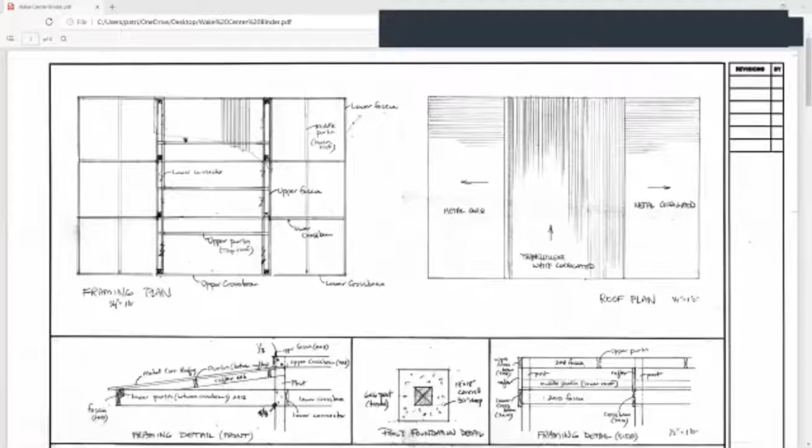Okay, do you guys see this blueprint on the screen? Yes, okay.

So I live in a community, a planned community. It's like a condominium, except we have yards and condos don't usually have yards. But there's common area that everybody owns. It's called Winchester Canyon. But when you change anything on your house, you have to get permission from the community. So we have a board of directors and a landscaping and architecture committee, and we have to submit stuff to them. Then they take it to the board and the board approves it. And then you have to take it to the city and get a permit. So there's extra stuff you have to do here.

So the back of my house, that's this right here, used to have just a roof. This is my dining room, this is my bedroom up here, and there was a window from the bedroom that looked out this way. And my wife said, you know, it'd really be great if we could have a balcony up here.

Can you do that? And I said, well yeah, sure, I can do it. So I went to the city and asked what I needed. The great thing about going to the building departments - Goleta was fairly painless, but I've been to building departments in the past, including Santa Barbara County and Santa Barbara City, that were not easy to get through. I don't know how they are now, they change over the years, but Goleta was really friendly, and they said you don't have to have an architect draw them, just bring some drawings about what you're doing.

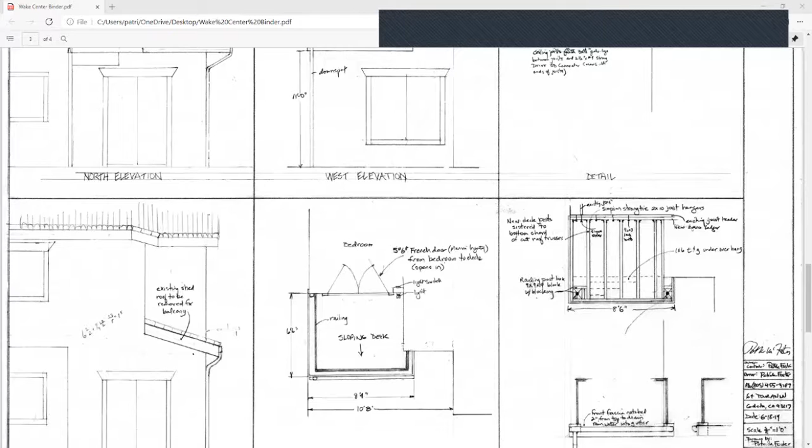That's probably a rare occasion when that happens because the laws are getting stricter all the time and it's just hard to keep up, and they'll undoubtedly have things to tell you. So they thought this was all okay. I have joists that are connected to a beam, and I had some foundation for the railing. And then I had a special coat - what's that called?

Tough coat or a bituminous deck cover. And then somewhere I talk about this, the particular decking system I'm going to have.

So they were fine with these. Then I went home and started demoing the ceilings, because that's how you get in. I demoed this roof and then there were just joists. And then I had to demo the whole area where the joists are. And when I demoed that, I got in the kitchen, looked up, and the joists were I-joists.

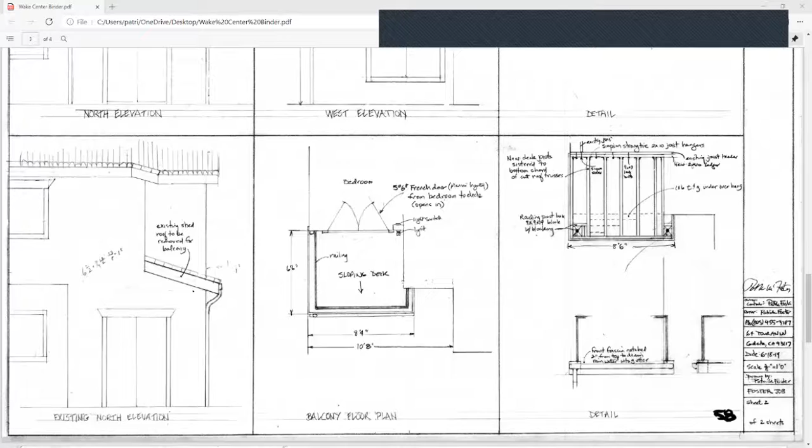You can't see where these are sloping here. I didn't know they were I-joists. So I thought if they're 2x10s, I could just cut them from the full size on the door end, cut them a couple inches or whatever for a quarter inch per foot slope. And I could just leave the ones already there, and maybe double them up if they're not 16 on center. They were 16 on center, but they were I-joists, and you can't cut into an I-joist like that, right?

Oh man, because that top part that holds the webbing, you can't mess with that. It's like a 1x2, and even 2 inches would practically get rid of it toward the end. They said, yeah, uh-oh, you gotta redo this. And I went, oh no.

And I said, what do I gotta do? They said, well, first you gotta go to a structural engineer. Well, there went my simple project, right? More money, more money. I turned to my wife and said, you know, we've only got a little bit of the sheetrock off, maybe we should just call it a day. And she said, no, let's do it.

So I went to the city, and let me show you what I also had to do, what the structural engineer gave me. So this is a picture of the lot. I'm on the board of directors, so I have access to all the blueprints in our community.

They have the most, they have site plans, a blueprint, a floor plan, but my particular unit's was lost over the years and I couldn't find one. So all I needed was a plot plan. They don't care what the interior is like. They just want to know, basically, if you're adding a room. This is a balcony, so it doesn't really add footage, but if you're adding a space, they want to make sure there's a ratio of built area to unbuilt area, yard area, that's a certain amount, not above a certain amount. So they ask you for all these things.

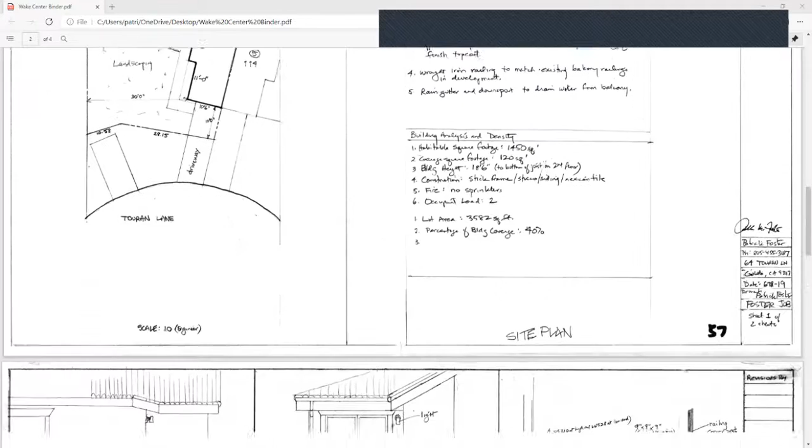Donna may know the proportion, I don't know it offhand, but 40% was okay. That's what I didn't add, so it had to be okay because it was what the original proportion was.

So if you don't have a plan, you know, you buy an old house, or you're renting one, or living with someone who doesn't have a plan, you're going to have to measure and draw this yourself, that's a pain in the ass. So it's really nice to have any kind of floor plans. Like I said, the city usually has plans for everywhere in their archives, and you can go get those. I don't know what they cost, I've actually done it before but I can't remember if I paid them. They probably have a fee for finding them.

But almost every, especially in a development that's highly regulated, they really hawk developments because if a builder could build one house in a crappy way, but he builds 50 houses that way, that's really bad. So you have to have a location map.

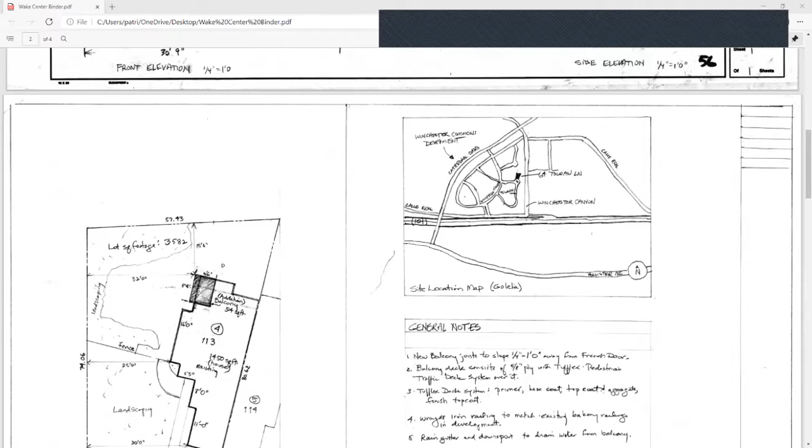Remember on the site plan, we had a location map so the inspector knows how to get there. This has the freeway and tells how to get to my house. Then general notes tell what I'm building, a balcony with French doors. The balcony consists of 5/8 ply with Tufflex, a pedestrian traffic deck system over it, and then I tell them what the system consists of. Then a wrought iron railing to match the existing railings.

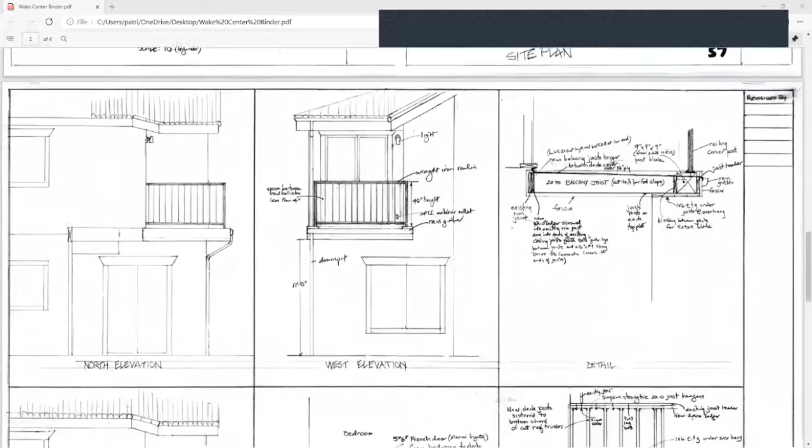In a development, everything has to match, so you have to kind of see. I had a friend who built wrought iron railings, so it was really great - I just told him what I needed and got a pretty good deal because I didn't have to go to a big company. And then you have to say you're going to complete a downspout and a rain gutter. So that's all - these 2 sheets were all I turned into the city.

And then after they told me that I would need a structural engineer, things got more complicated.

Okay, let me share those with you.

Okay, can you all see that screen? Yes, yeah. Now I'm learning things about this computer. We can't see this one though. Yeah, I know, with this particular... is it just loading up? Or no, I got to get rid of this thing. I don't know what this thing is here. That's so weird. There it is.

I get that, so if you go to this other place and then go to adjustments, then you can enlarge it and it won't... you can enlarge it and go up or down. On the other print, it wouldn't let you do that, so you have to go to a kind of edit type print.

It's still blocked out, Patrick, because you're sharing file viewer, not the viewer of the PDF or whatever this is. It's gray for us. Yeah, because you're in application sharing - you're sharing file viewer. Well, what does it look like? It's gray and not yellow. Yeah, it's grayed out, like a privacy filter over the top. But can you read it? Oh no, it's 100% blocked out.

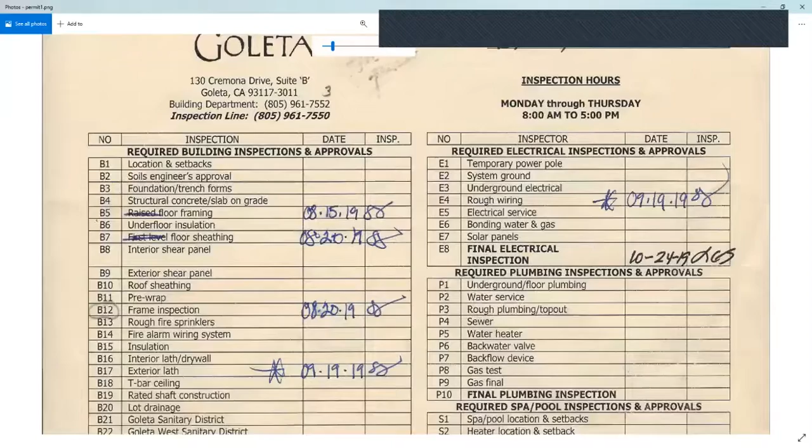There you go. Okay, so I want to get to the top because it's got City of Goleta, Building Department, Inspection Line. The Building Department rarely answers their phone and the inspection line rarely answers their phone. If you leave a message with the inspection line, that's calling for inspection, so they take that seriously and they will call you back. They do have a web, an email access that they answer sometimes.

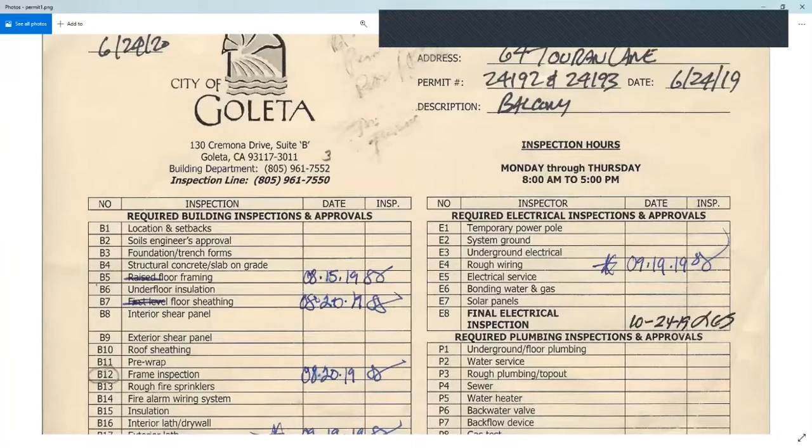So this is the form. They give you an expiration date. It has to be a certain time after you start. It has inspection hours. They're only going to come Monday through Thursday, 8 to 5. And then this has a list of all the different inspections that have to be done for this particular project. So let's go through those.

Since it's a second floor thing, we don't need anything to do with the ground, so no soils tests or slabs or anything. I guess they always cross this out because if you're doing second floor framing, you're always going to cross out the raised floor items. This is all kind of the first floor foundation stuff, so they cross that out.

Floor framing - I'll show you what I had to do with the framing. They had to inspect it because it had to be designed by a structural engineer. And then the sheathing had to be inspected over it. And then the frame inspection - I had a doorway I put in, a French door, so they had to inspect that. And then they have to inspect exterior lath.

Some of you may work in the lath field. So before it's plastered or stuccoed, they have to look and make sure the lath's put on correctly. In fact, on my job, the lath guys forgot a strip along there, and the inspector caught it and said, hey, you're missing a strip, you got to have that. So I had to call these guys back.

But the whole idea is to get everything approved in a tight order so you don't have to stall your subcontractors or your own work. That can be very difficult.

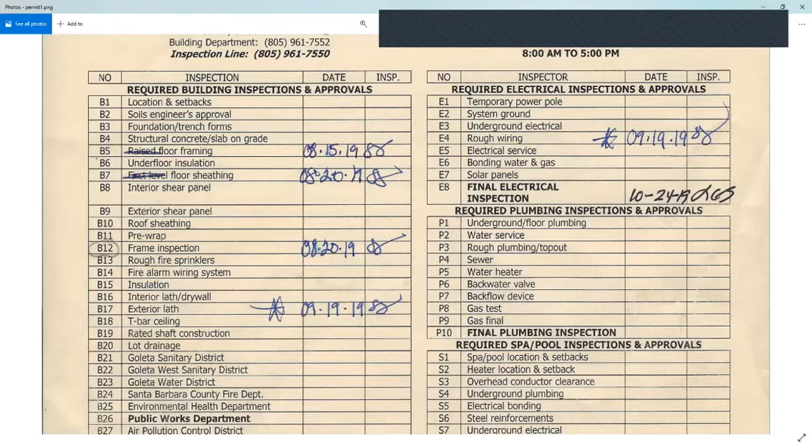Okay, that was all for the building framing part. Then there's mechanical - I didn't have any HVAC equipment, so that is irrelevant. But I did remember I had to put in a light and an outlet, so they had to do a rough wiring inspection. Before you cover the wall up with sheetrock or stucco, you have to have the rough wiring done so the inspector can see it. And if it's going to be covered up, you either have to take pictures.

So when I was doing my electrical, I did some of it and I had an electrician do some of it. The inspector said the holes in the floor plate that the wires went through - she said I had to insulate those.

I had to put some kind of foam around them, so I went and got some foam and sprayed those. There were little things I had forgotten about. And then there's a final inspection. It was the rough wiring and the final - she would notice if the outlet was done right and the light was done and all that. So that was all for the inspection.

But let's go to the... where is this thing? Yeah, there we go.

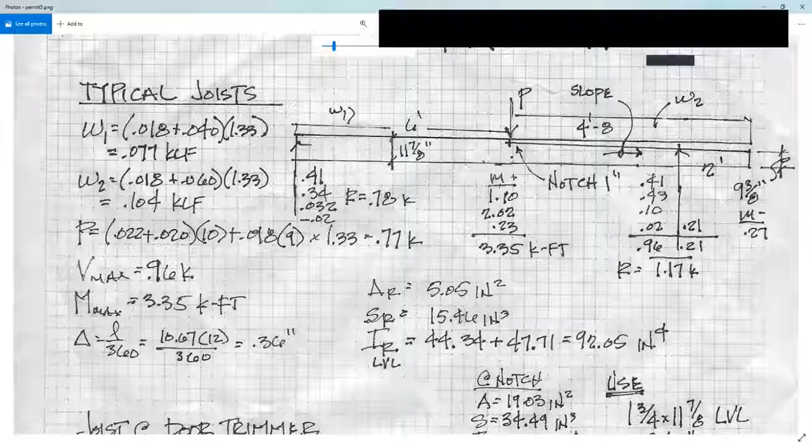Let's go to the last one here. Can you see this okay? Yes, clear. So it's pretty messy, but - 16 penny, see up here, upper left-hand corner, just follow the purple cursor to here: two 16 penny nails at 12 inches on center. So every foot I had to nail these two beams together, the LVL and the I-joist.

And then here there was a header - no, it just took blocking, I don't know what that was. Ply filler at each TJI web. So I put 1 by 12, same thing in there. And then he told me how to block.

And then on this wall, I see that little A35 - somebody was asking me last week about A35. So you need that to hold the blocking in. What else does he say? Yeah, then there's another A35 to each LVL against the beam.

So not only was the LVL nailed to this I-joist, but I also had to hang it to the beam, because one side was only open since it was sistered to the other beam. I had to use one A35 to the beam here. So that's what'll make it earthquake proof.

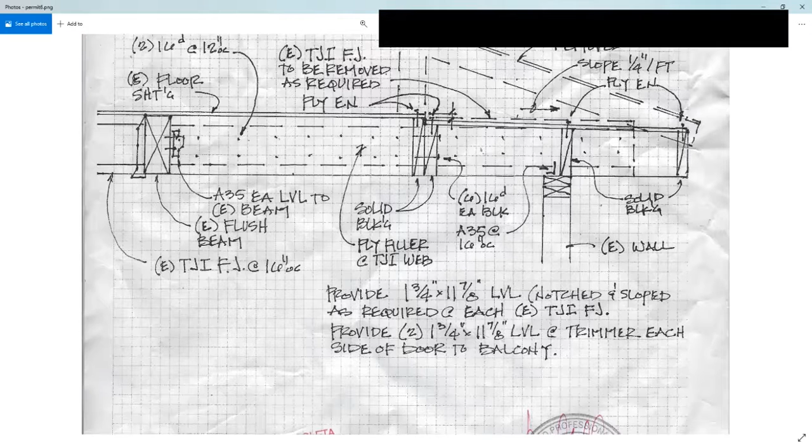So let's see, what are these other things here? Oh yeah, here's something important.

How's everybody doing? Good, man. I like the idea there, saving some labor by putting the wife to work. That's good. Hey, you may draw fire for that - it's the tip of the class so far. No, I was kidding. She wanted the balcony, right? Yeah, I know she did. She's a trooper too, she got right out there and did it. That's right, that's a lot of fun when you work at home.

One of the reasons I'm showing you this is to take the mystery out of it - the city does a lot of the work. A lot of stuff has to be engineered now because the city doesn't have the time or competence to approve certain dimensions of plans, so they just require it. An engineer has that competence. If there's any question at all, they don't want to get sued for approving a structure lacking quality or strength.

So that's cool, and some structural engineers charge a lot of money. I looked around and asked Rodney who he used, and somebody recommended this guy, and he was just a hero. He's inexpensive, and he's smart as a whip.

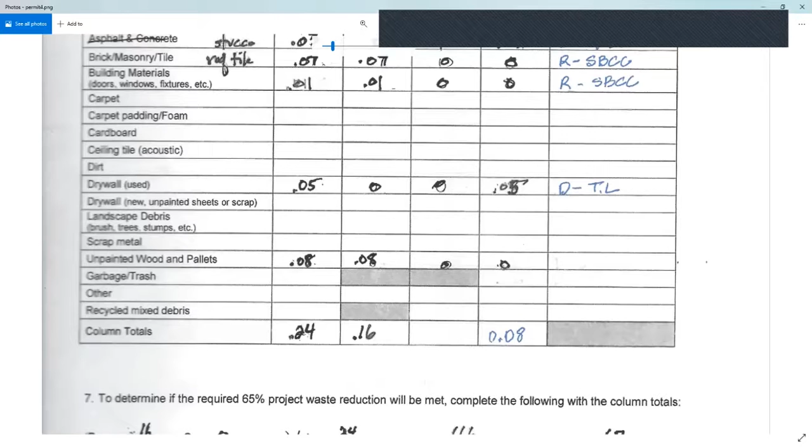So then you have to do a post-construction waste reduction and recycling summary report. Let me make this bigger for you. So material handling methods indicate quantities and tons only for each material.

So I had stucco that I demoed around the door - under the window was stucco because I was putting a door in, and I had to figure out how much stucco I had. There was a formula I used that converts the square footage of stucco into weight, and I ended up with 0.03 tons because it was just a little bit of stucco, but they want to know. I disposed of all of it to the Tajiguas landfill because there was nothing I could do with it.

I had roof tile, I kept that - it's in my backyard. I might take it to school if we ever have projects where we can work on tile. There's not a lot, but I didn't put it in the waste stream and I could write it off. Then building materials, the wood I ripped out, the window I ripped out - I recycled it, took the window to City College because we can use it in our flashing and window installation lessons.

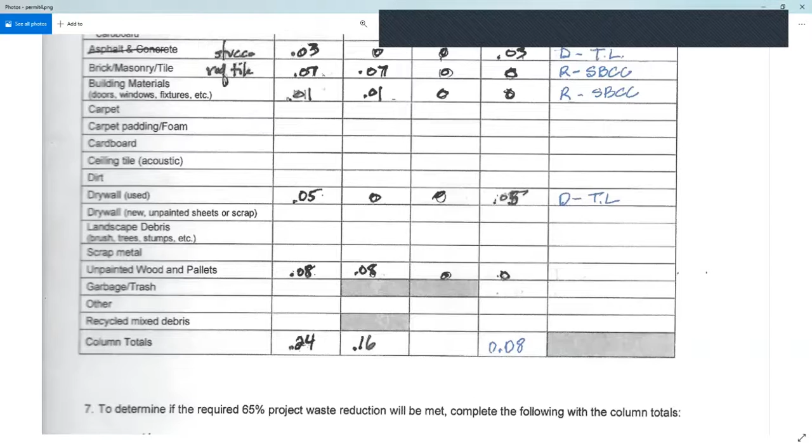Drywall, same thing - it was probably too much to take to the guys who collect it, like Lash and those guys, so I just dumped it. Unpainted wooden pallets was that. Then I had a total. I had totals here, and then this is the formula they use to determine it - they take this number and this number, which was 0.16 tons.

0.24A, and that equaled 2/3 or 67%, so I was right on the money there. And then they asked, is this percentage listed in 7 greater or equal to 65%? And it's greater, so I put yes, and that was it. She signed me off. So that's what you have to do with your materials.

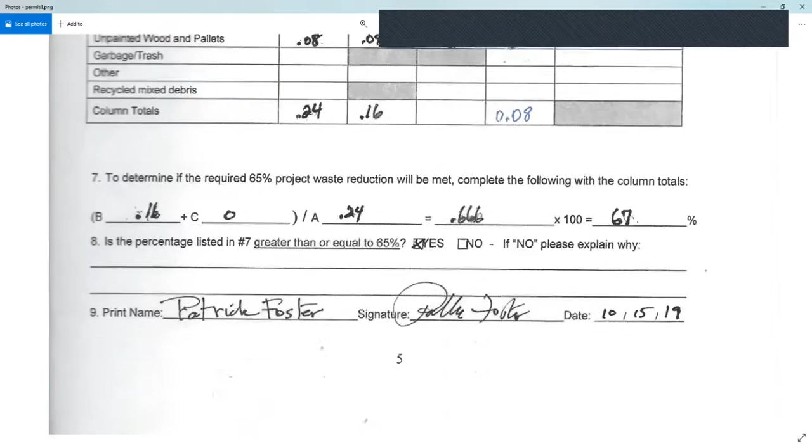Takes a little bit, when do they start requiring that? Like, when is this a requirement? Well, it's been about a few years, not long. No, but I mean, as far as like when, so any project you're gonna do, I mean yours wasn't a huge project, but any project is gonna require it.

Any project you get a building permit for. So if it's too small for a building permit, or you do it on the sly, then you don't have to do anything. If you get caught, they'll make you do it all. But a lot of people don't even know if they have a small project, if it needs to be permitted.

So our association wanted to get a permit. Our association wants to do a children's playground. And I told the people on the playground committee that rather than buy a $50,000 plastic children's playground, let's make one, I've made a bunch of them in my life. And I said, we've got contractors for homeowners here, and a lot of people that would give labor. So I called the city and said, do we have to get that approved?

And of course he said yeah, once you call him you're stuck. I should have called anonymously, but I didn't. He said, yeah, you need a permit, but he said you guys can build it, you don't need a contractor. The whole association can act as a homeowner. So I found out that was good.

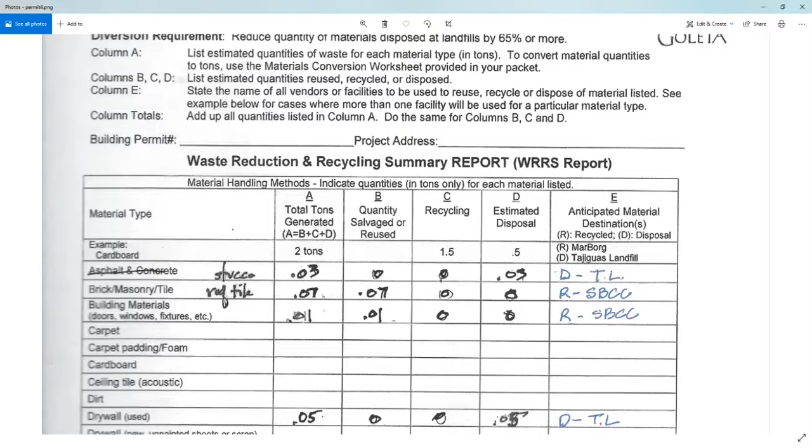The what? I think you froze. Okay, it froze up. Can you hear me now? Yeah, I can hear you now.

'Cause it's gonna be open to the public, right? Just to the people in our association. And I guess that's considered public, but in a way it might be private, I'm not sure how they're going to label it. But we do have to get it inspected, we probably will have to get it inspected.

Sorry, it froze on me for a while. Sorry Patrick, so you said - is this Marcos? Yeah, because I work for the schools, and so if it's open to the public, you open yourself up to the liability, right? So I'm buying one of those drop testing kits, they're expensive, they're like $3,500 just to buy the ball to test. And then there's also the spacing so that a kid's head can't get caught in between.

I can share some of the literature because I have a bunch of literature, I could probably send it to you on the side in an email. Oh great, sure, that'd be great, 'cause that's what I do, that's part of what I do.

And they're expensive, we just spent $100,000 on one playground. I mean, this is - I know, this is just an association, it's not that big. But one thing we're trying out is artificial turf as a playground surface.

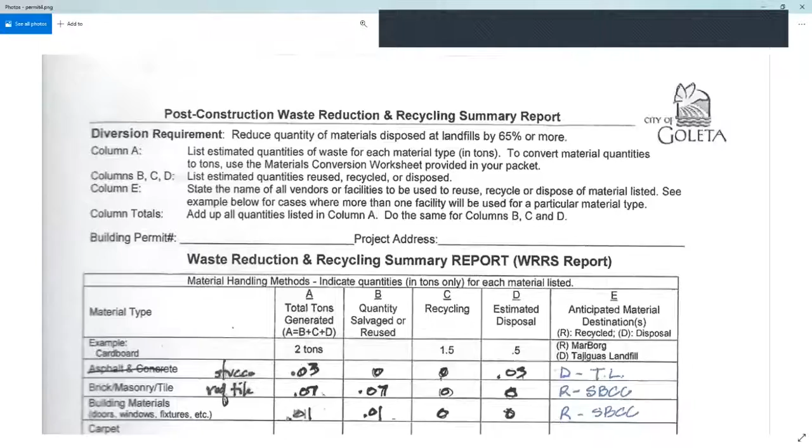I think it'd be fun to do, get everybody involved. I think that's what we should do with a lot of stuff because we don't have a lot of money anymore - things like global warming and worldwide pandemics are wasting our money. So we're gonna have to do everything we can locally and nearby as much as we can.

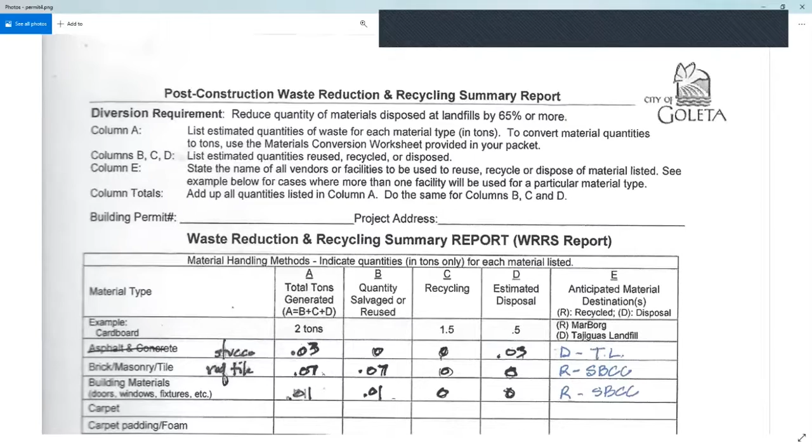Okay, so let me see what the last one of those was. Let's see, 5 and 6 was for... and that was the worksheet. And 2 was...

Oh yeah, okay. You can't see that, can you? No, not yet. All right, all right.

So after I did all that, they signed me off for the post-construction waste reduction and recycling summary report. I had two permits because I had an electrical permit, I had to draw for the light. If you own a house, you can be the owner contractor, you don't have to hire anyone. And even if you don't know anything about carpentry, you can still be the contractor and hire carpenters to do a lot of the work, but you're still listed as owner contractor. So that's one of the few benefits of owning a house.

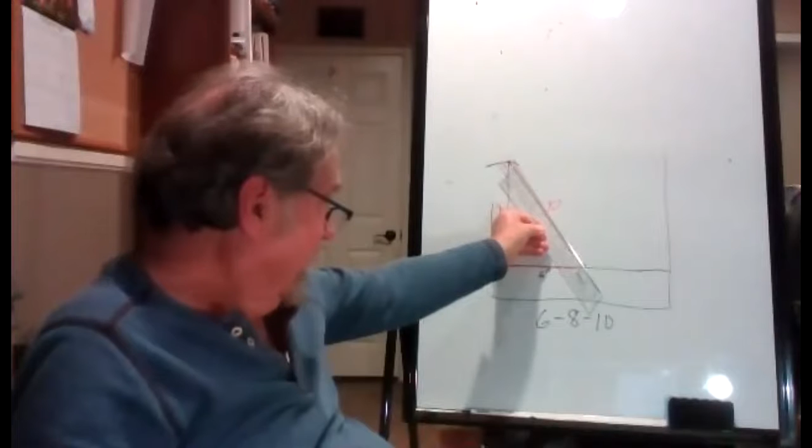And then you go up wherever it hits the arc, right? Now I had you do two arcs when I did it with a compass, partly because, well, you didn't really need to. It's the same thing as where the arcs meet. If you just go ten inches from the point to where the top of your ruler hits the arc, that's what you want. Everybody got that?

Wait, so do you want us to draw out that triangle? No, no. You can if you already have, but that's why it's good to draw with pencil, because if you already did it, you can erase it.

What we're going to do is we're making graph paper. Now, some of you may have brought graph paper because I said if you had it to bring it, but I didn't want you to go out and buy a pack of graph paper just for this. But I also want you to know how you can make something to draw with just a blank piece of paper. So now what I want you to do is, from this point, mark off every quarter of an inch.

Across your page, the whole way. So take your ruler or your scale and just mark every quarter of an inch all the way across, and then go up toward the top of your page. You can extend this line toward the top of the page. So go, whatever, if you got an 8 by 11 sheet, maybe go 10 inches, and then do every quarter inch all the way up to the top of 10. You're going to measure 8 inches this way, and you're going to go up 10 from here, and you go up 8 across here. And then you're going to do a quarter inch across there and a quarter inch starting at the bottom across here. And if you connect all the lines, you'll have a sheet of quarter inch graph paper.

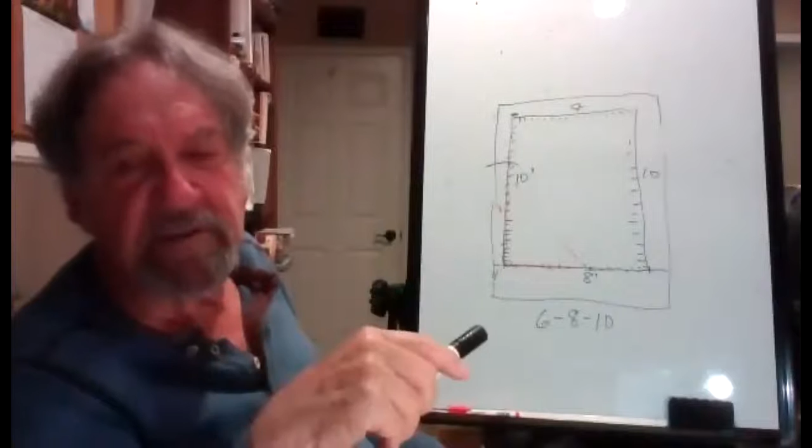Now, the reason I asked about if you'd worked with graph paper, you know that there's several sizes of squares in graph paper, right? One common size is quarter inch, so the squares are quarter inch like this. Some are, what's the next one, five sixteenths or three eighths? I think it's five sixteenths or three eighths. Anybody know? I don't know. Okay. But when you buy it, there's usually a couple sizes.

So the quarter inch is the most convenient. And why is that? Quarter inch scale, yes. Most of your drawings on blueprints are quarter inch to a foot. So if you already have that mapped off, then you can just count squares and each one's a foot.

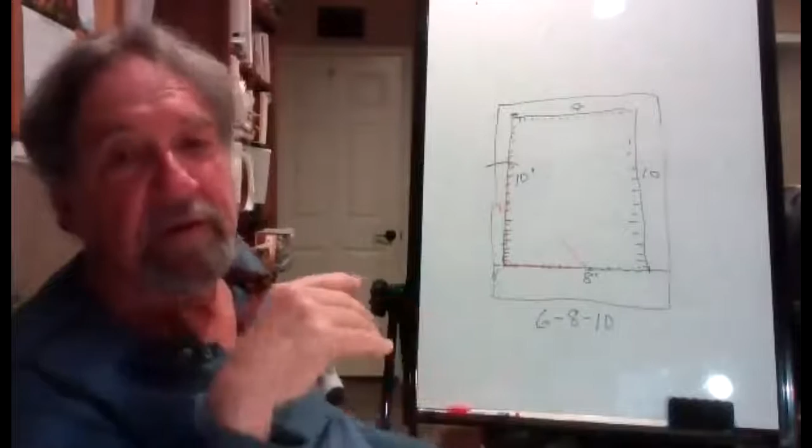So Rodney does cabinet elevations because he's a cabinet maker. He's probably done blueprints for houses and stuff in his past, but the last part of his career he was a cabinet maker. And he always has a little pad with him and it's always got graph paper on it. He uses that to draw out the face, the way cabinets look. He carries that around with him like the nuclear weapons codes that the president carries around with him.

Hey, you translators, how do you translate nuclear weapons codes that the president carries around with them? There's signs for everything.

You know, when they showed, we've been barraged with pictures of the insurrection at the Capitol, right? And the last set a few days ago was they showed Mike Pence being hustled out of his office. And they showed the guy that's carrying the codes, the nuclear codes, following him down the steps. You could see the guy carrying the briefcase. It's the first time I've ever seen the actual briefcase. And they were saying, whoa. And then they had to calm the public down and said, no, those aren't activated. They deactivate them at periods so they won't get in trouble. At least that's what they're telling us, right?

We don't know for sure, but the guy had a uniform on with yellow cord, that kind of decoration uniforms have. So he stood out, nobody else had that kind of uniform. I'm going, why do you want the guy carrying the nuclear codes to stand out with a ridiculous uniform?

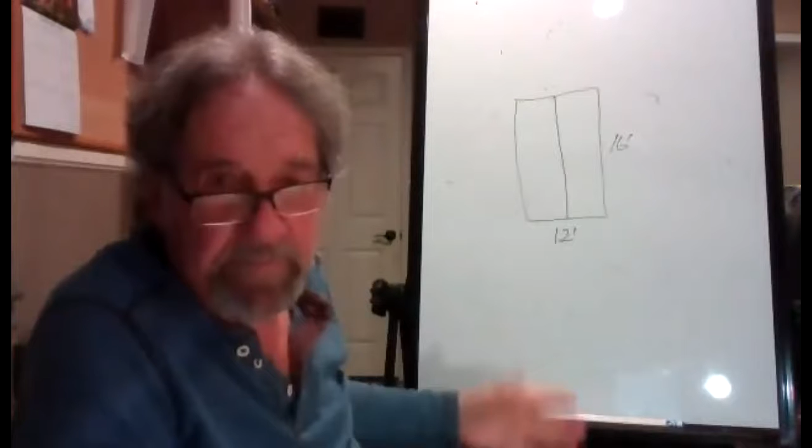Okay, so we talked about this in the worksheet we did a couple weeks ago, remember? We said that if you see a plan view of a roof, a building this simple wouldn't have a roof plan, because if you know it's a gable roof from the elevation, there's not much to know about it except the slope, which they give. But if you have a roof plan,

that means it's looking down from the sky at the roof, what you'd see if you're in an airplane or whatchamacallit.

So this means that — now you don't know for sure until you see the rest of the plan, but usually when you see this, this is going to be the ridge. It's going to be a gable roof, a roof like that. Gable, G-A-B-L-E, right?

So that line down the middle tips you. Now believe it or not, they make this thing called a butterfly roof. And from the top, guess what? It looks just like this.

There's a bar called the Crocodile Bar, on State Street, Upper State Street — what's that street? Alamar, I think. Alamar, thank you. When you drive into it, there's a little covered area where you can drop off people, and it's got a roof like that. It's the only one I know of in town.

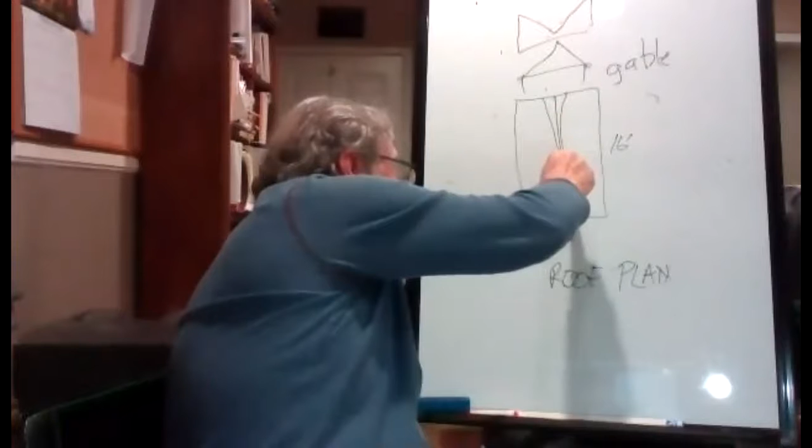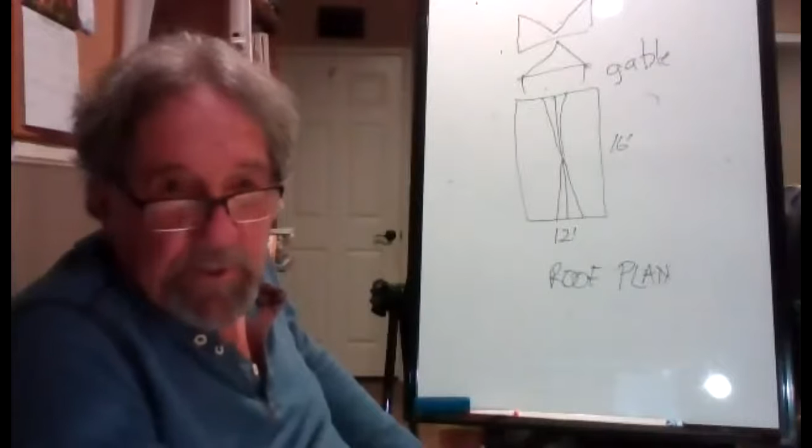these little boards on top where the water hits and will go down. They're called — I forget what they're called because I'm senile and losing all my construction terms, but I'll get it in a second. They're little pieces that shed water, so you have to do that.

And if you looked at that one at the Crocodile Bar, if you got up on a ladder and looked at it, you'd see that they have that, and that sheds the water. A cricket? Cricket, thank you. So they call those crickets. There's another name too, but you don't need to know that — it's not going to be on a test and it's not important, but just for your own knowledge.

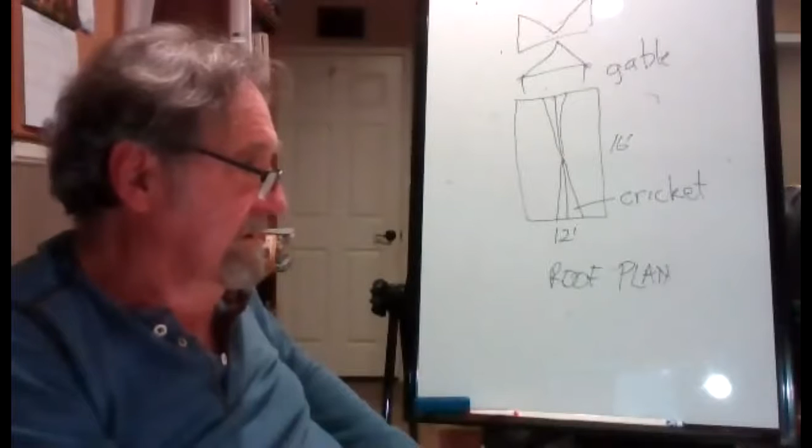So wouldn't the crickets go the other way? Would they? When they go to a point at each end, yeah, they would. You're right, I'm wrong. You look like that, so the water coming down will go that way. Yeah, the other way would make the puddle even worse — you'd have a ton of water in the little center of the roof. Not a good design. Yeah.

So the crickets go like that. In fact, one of our plans, the one that Armando did — under one of your sets — has a roof plan with a cricket like that. It's blackened in on the plan. So anyway, that was an aside.

So what I want you to do, let's do it for homework. Well, let's do this one right now. So here's the thing.

Okay, there's your paper, right? That's the border of your paper. This is the drawing, the roof plan. When you're drafting a set of blueprints, if you just have a single page for this, it's kind of artificial, but just go with me. Single page for this one roof plan. What you have to do is center it roughly on that page, right?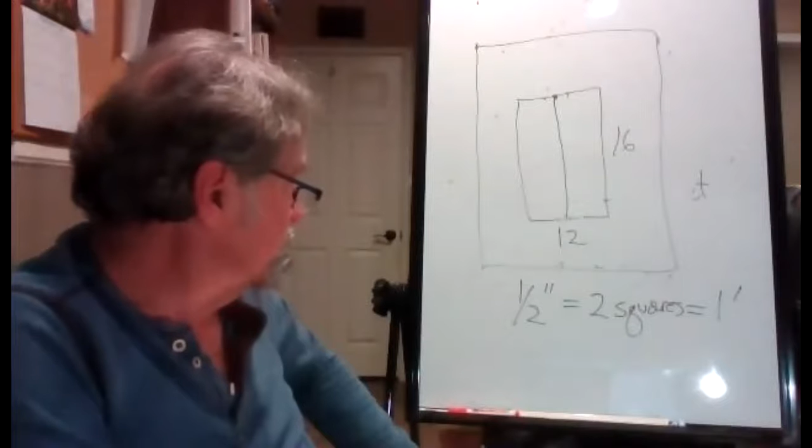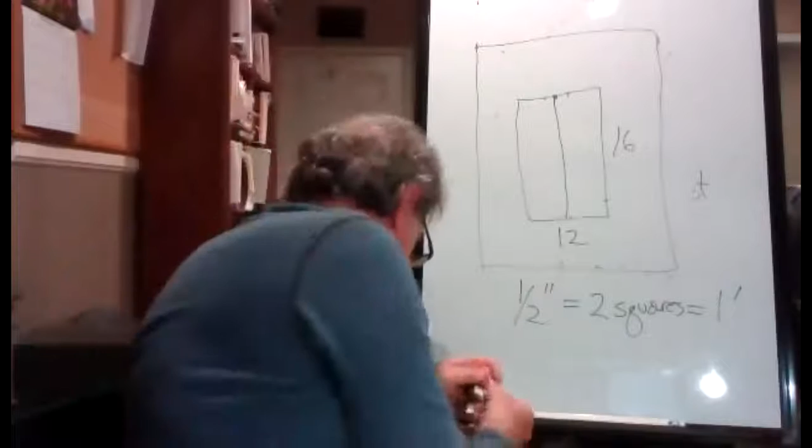So there's 2 ways to do this. One is to draw center lines going both ways. So if you take your 4x8 sheet, or whatever your graph size turned out to be, and you draw it both ways, this is half and this is half. Then the roof line, the center line, will obviously be on that line. And this will be half of that: 6 feet this way and 6 feet this way, 8 feet this way and 8 feet this way, right?

Yep, that's probably the simplest way to do it. I never did it that way growing up, but somebody in one of my classes said, oh, that's a good way to do it. I would take this total distance here, say it's 8 inches on an 8x11 sheet, subtract this distance from it, and then divide it in half. And that would give me that much. So you can do it either way.

This particular roof lends itself to dividing the paper in half both ways. Everybody got that? Yes. Okay.

So go ahead and put a 12 by 16 roof on an 8 by... at a 1/2 inch equal to a foot scale, with no overhang, so it'd be 6 inches across and 8 inches high, right? That should fit on there, okay. Yep, that'll fit. And you want it right on the center? Yeah.

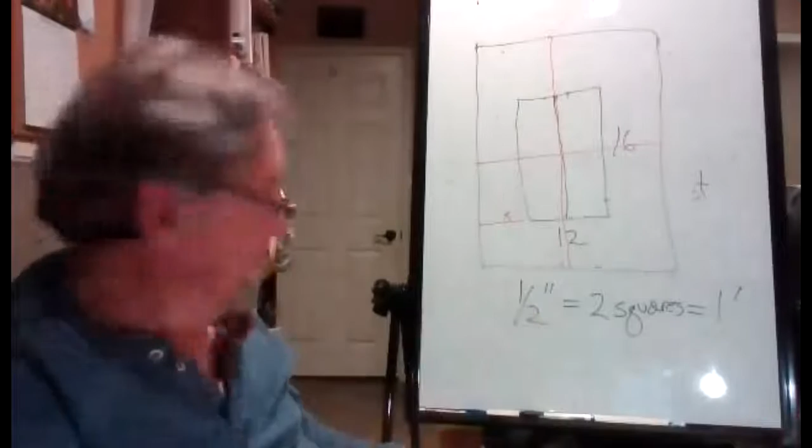So, so this roof has no overhangs? Yes, it will have overhang. So one thing I want you to do on this plan is put a dotted line where the walls go, the outside of the wall. The outside of the wall is 2 feet in. So put it 2 feet in.

So let's see who's here. Donna... Maybe she was afraid I'd ask her questions. I was going to grill her, you know? This is the one time we had to grill an inspector because they grill us the rest of the time. God, so she chickened out. You know, she probably knew I was going to do that.

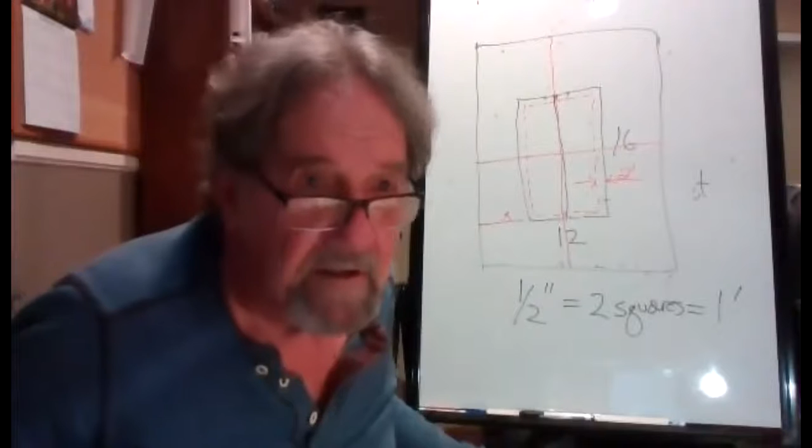So let's see. So 2 feet would be half an inch or 2 squares. Is that right? I thought we're doing half inch equals 1 foot. Oh, we are. So it would be an inch, an inch in from the border. 2 feet or 1 inch, right?

So the dotted line is, you could say four of the little squares, right? Is that right, John? Yes. Four of the little squares in from the roof line. Everybody got that? That much we have to get straight before we move on. Say that one more time. We need to make sure we're okay with this before we move on, because this is important.

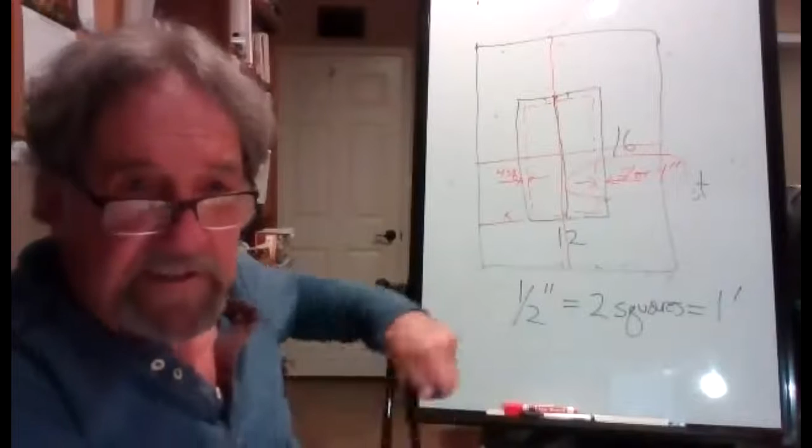God, if I could draw, it'd be dangerous, you know? So don't draw that on this plan. I'm just showing you something here.

So is everybody looking? No. So I'm gonna have you do an elevation of both sides. That's what you're gonna do for homework. So we've done that already, but we're gonna draw this to scale. So it's a little bit more involved.

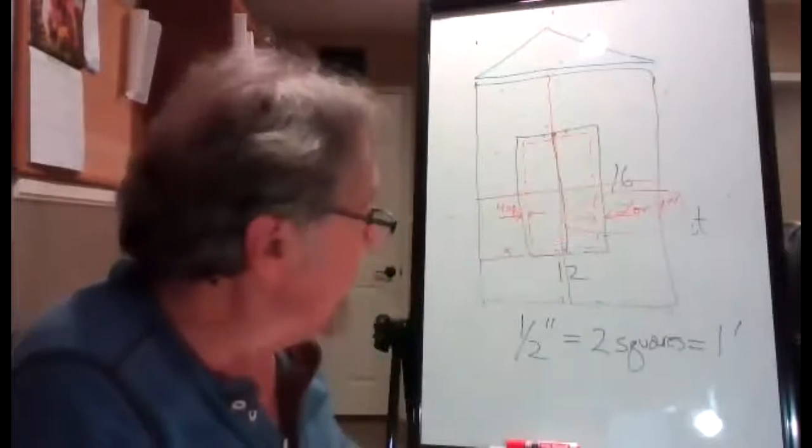So a gable roof has a triangle when you look at the end of it. If you look this way, the roof would look like a triangle, right? Sometimes the triangle doesn't have that bottom line because the stucco may go all the way up into the triangle. Sometimes it does, it'll have woodwork and it'll have that line. It varies. But for this, I want to draw the line. So when you're looking down at the roof, you're seeing the very end of the roof, right?

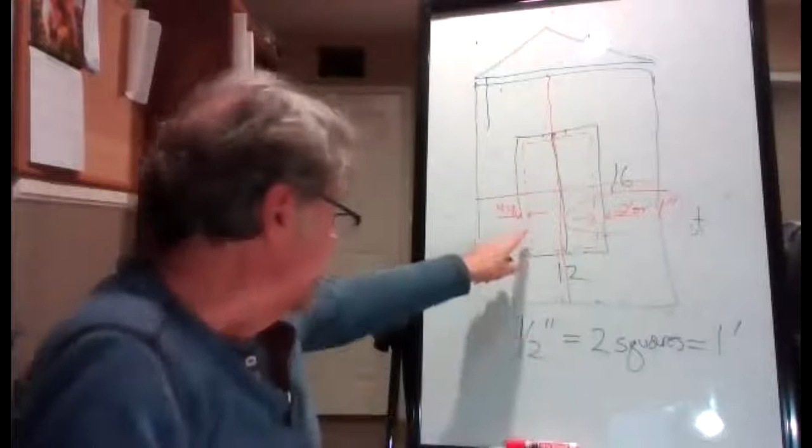And so the house comes in from the roof. It's got an overhang. That's what this is. This is an aside. This isn't part of the drawing. I'm just drawing up here.

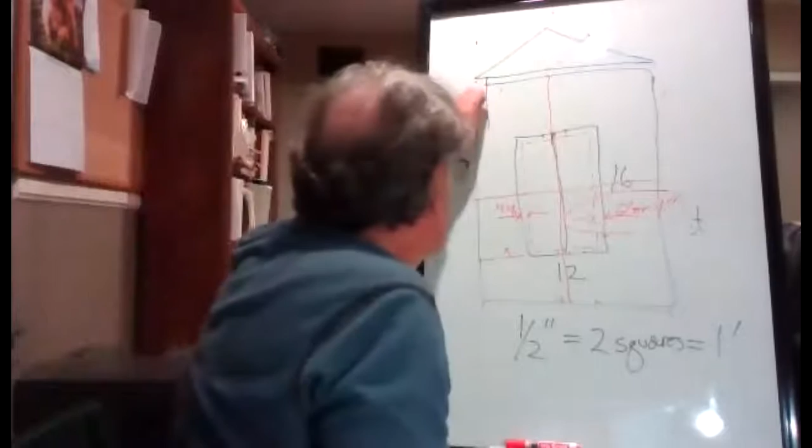So this overhang is the same as this here. So when you draw the elevation, which you're going to do at home, looking at this way, you'll see this right here. You'll see the roof and then you'll see the house 2 feet in. It's a 2-foot overhang. So you need to know the slope in order to draw that. You need to know the angle of the roof, and you need to know the height of the building, the height of the walls.

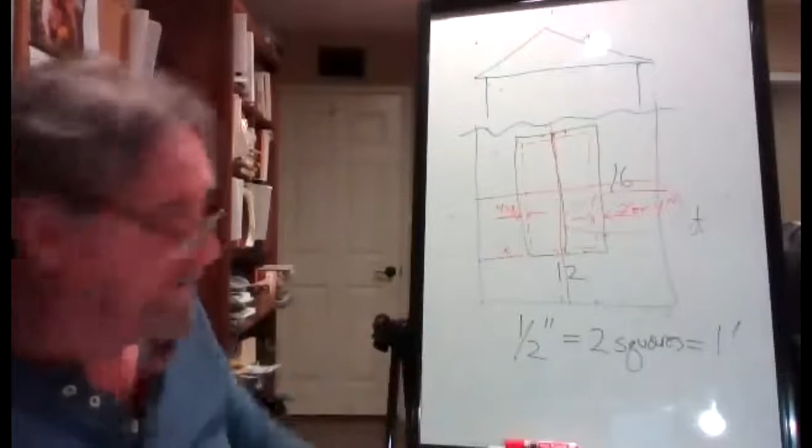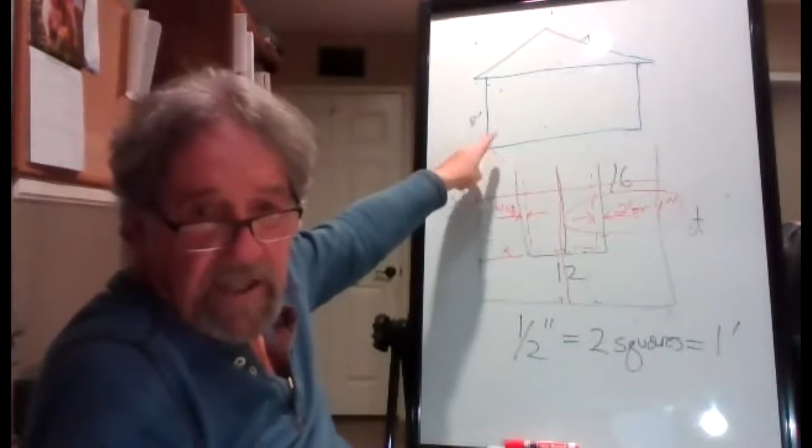So let's say this is 8 feet. That's a typical wall. Yep, it's 8 feet. Can Hugo, can you see that? Yep. Okay, so you need to know that to draw your elevation. You need to know the height of the building. Now the slope of the roof, let's do a 3-12.

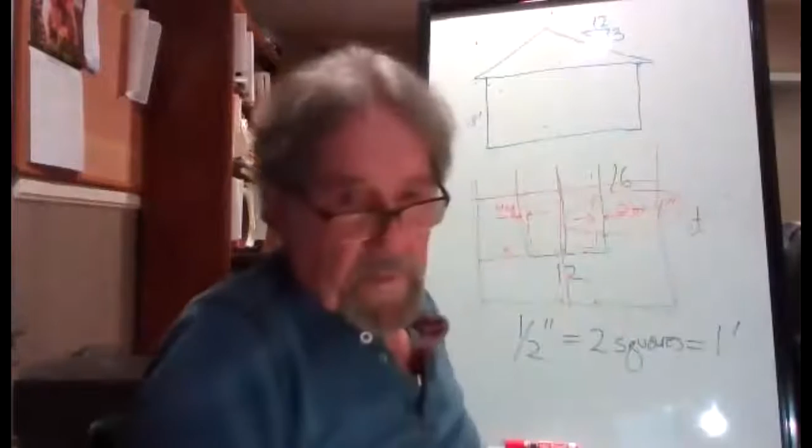Wow, I've got a light reflecting right on that, huh? How interesting is that? Not very interesting, huh? I've got these can lights that are burning down.

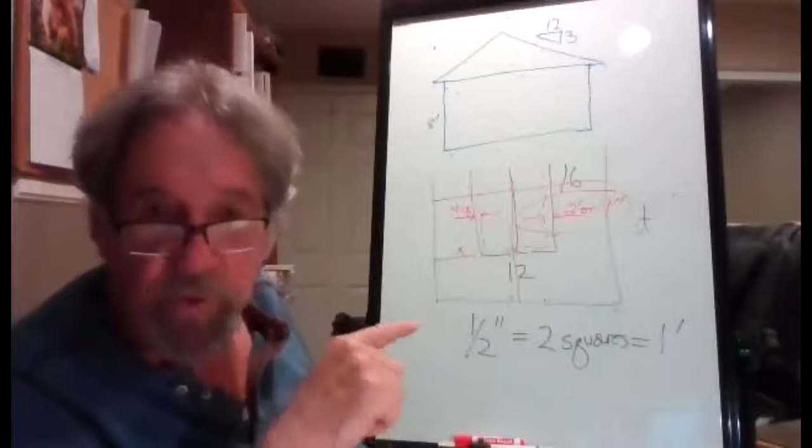So your elevation is going to look like this, and it's going to be 8 feet. The wall's 8 feet. Now, let's figure out how we're going to draw the angle of the roof given the slope I want it to be. I want it to be a 3-12 roof. So that means for every 12 inches, feet, or centimeters you go sideways, you're going to go 3 up, right?

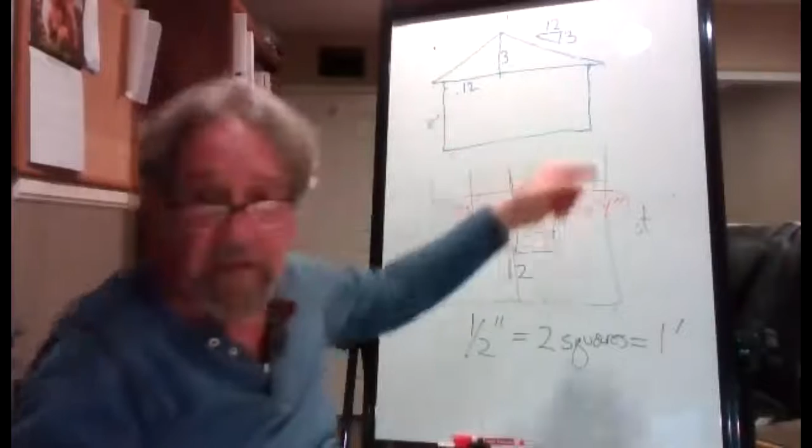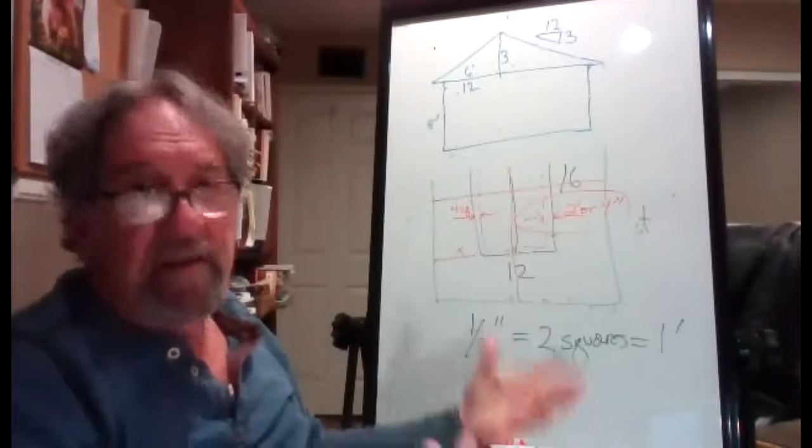The slope says for every 12 we go this way, we go 3 up, right? But on our drawing, that isn't 12 feet. This whole thing is 12 feet. So what do you suppose half of the roof would be? 6 feet. So we're talking 6 feet, that's half of that 12. So what do you think the height's going to be? 1.5, yeah, half of the 3. So the height of that roof will be 1.5 feet from the top of the wall.

So if you're looking at the roof plan, it's not going to tell you the slope, so you're not going to know how steep to make that pitch. Someone's got to tell you. So I'm telling you it's 3-12, and I'm telling you the walls are 8 foot high. That's all you need to know to draw the whole thing.

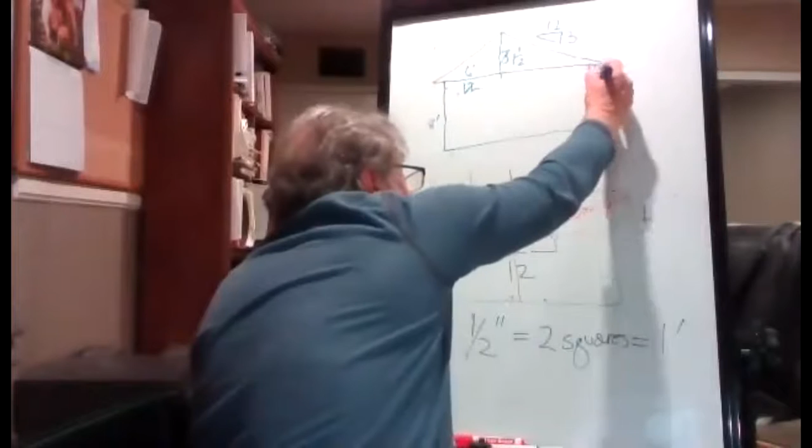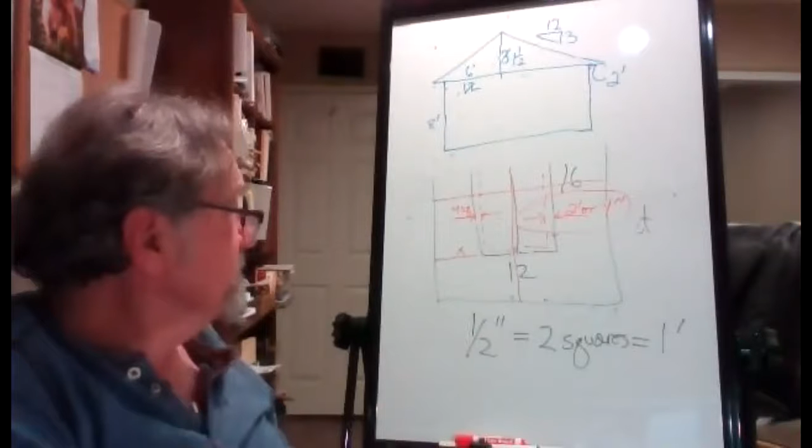And the overhang's 2 feet. So that should be enough information to draw the whole building: the two side views, the front view, and the side view. Like a north view and an east or west view.

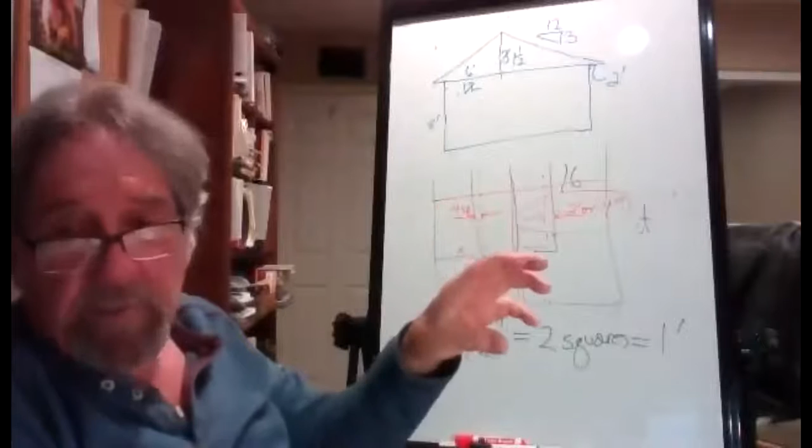Yeah, you can do it. You can do it if you want to label it with a compass direction, or you can just put front view — let's make this the front. Actually, in this kind of house, that's usually the side view, because the door's on that long side usually, but I more want you to play with the numbers and shapes.

Wait, Patrick — how would, is that number say 3.5 feet tall the roof is? No, I crossed out the 3 and put 1.5. Oh, okay, so let me clarify one thing here: I'm writing the actual feet of the roof.

And these are feet — these are the actual dimensions, not the inches or the squares on your paper. Got that? Yeah, got it. Okay, Hugo, what do you think? You think you got enough information?

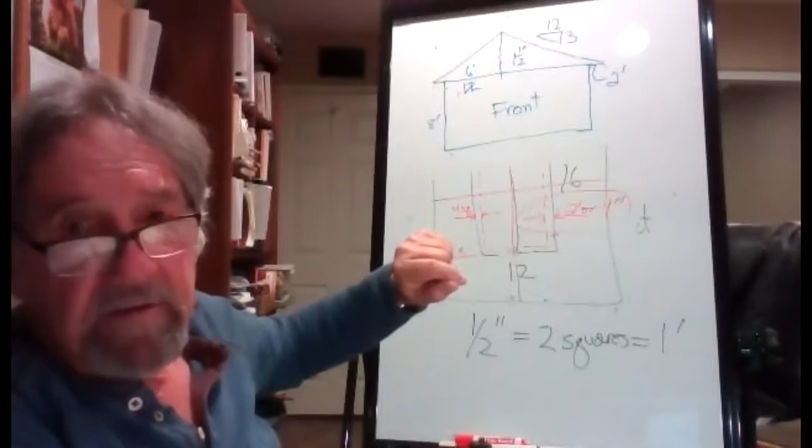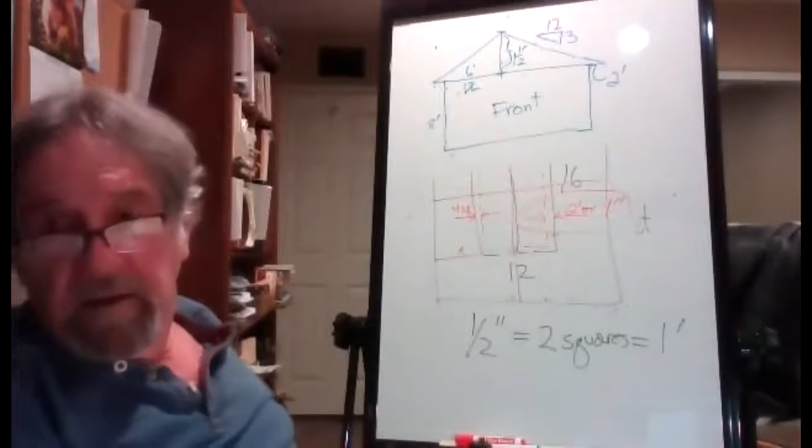One and one half, and then the three — I'm a little bit off on all the dimensions that you were describing. Okay, so all the numbers going in the horizontal direction — I know that's 12, but then what was the rise if we go from the center to the peak of the roof? That was 1.5 feet. This is from here to here. Okay, all righty. So then, when you were speaking, those are all the blue rise numbers — you changed it to 1 and a half because...

Well, okay, but let me repeat one more thing and then I'll tell you. All the blue numbers are the actual numbers — they're in feet. That's what the actual house would look like in feet. They would all be different when you're drawing. You wouldn't draw 6 foot and 1.5 feet, right? Because you're doing half inch to a foot — you've got a scale. Okay, he's got it — yeah, I understand.

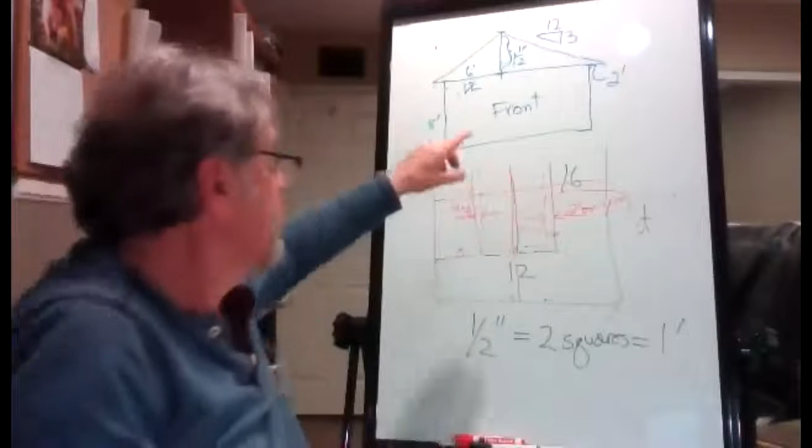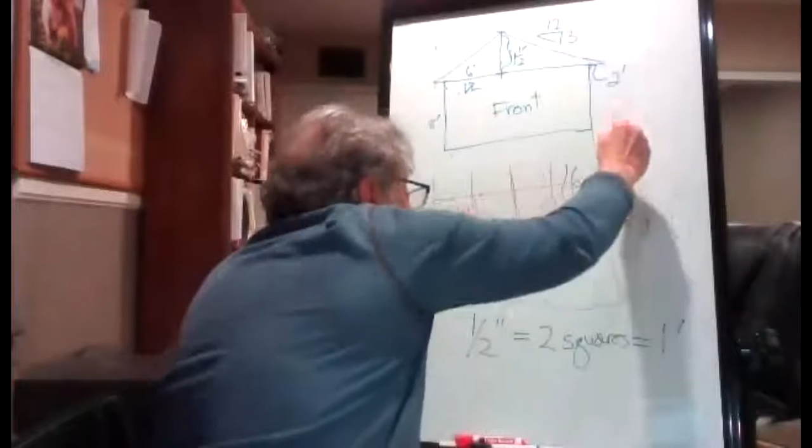Okay, good, that's the main point — everything else we can get from there. So the way I found those numbers, that's what he wants to know, is the slope is written like this on all plans. And the top number is always 12.

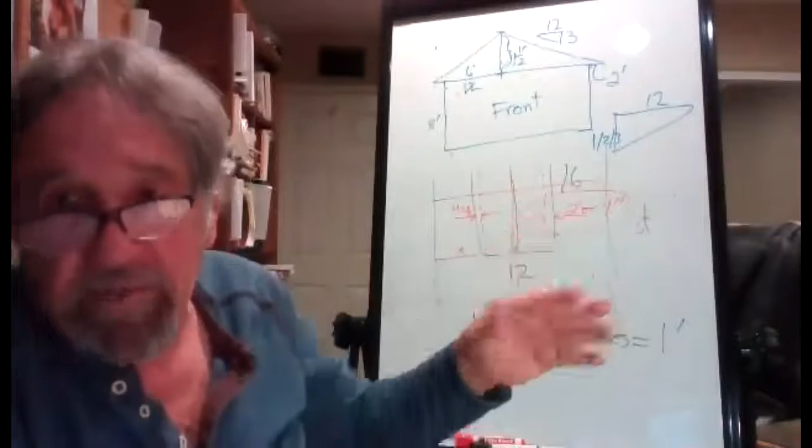And this can be 1 or 2 or 3 or 12 — it can be a variable. It starts at 1-12, like this, 2-12, 3-12, 4-12, 5-12, 6-12. 12-12 is like a 45 degree angle. This is a 12-12 roof — that's real steep, we don't have those here, it's like snow country. So we have like 3, 4, 5-12 roofs predominantly in Santa Barbara. So I made it a 3-12 because I knew you could figure it out.

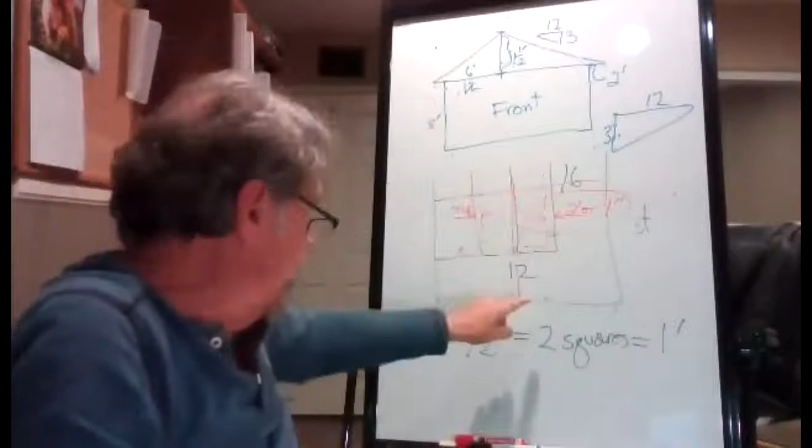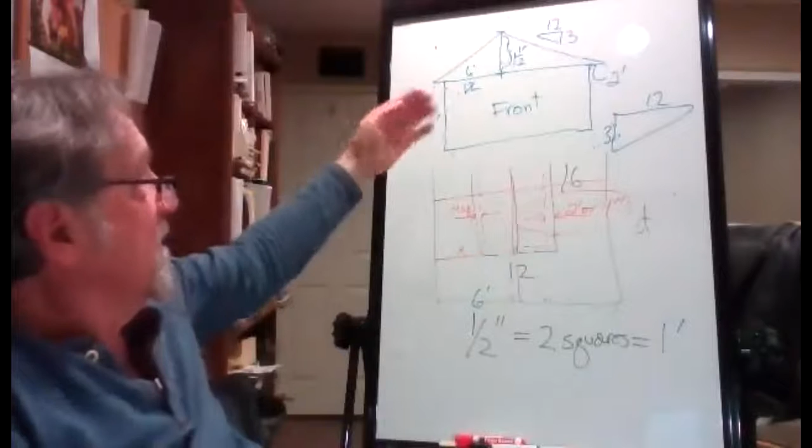You know, I made it easy. So if the roof's 12 foot across, that means half of this is 6 foot — this is 6 foot. And so 6 is half of 12, so the vertical must be half of 3. It's like a proportion.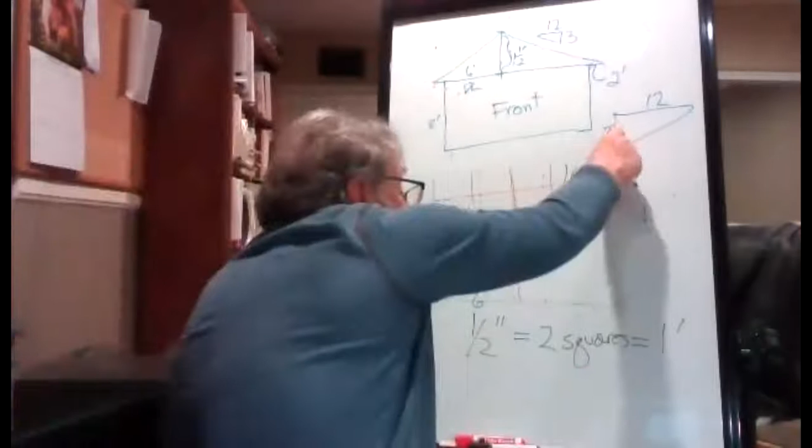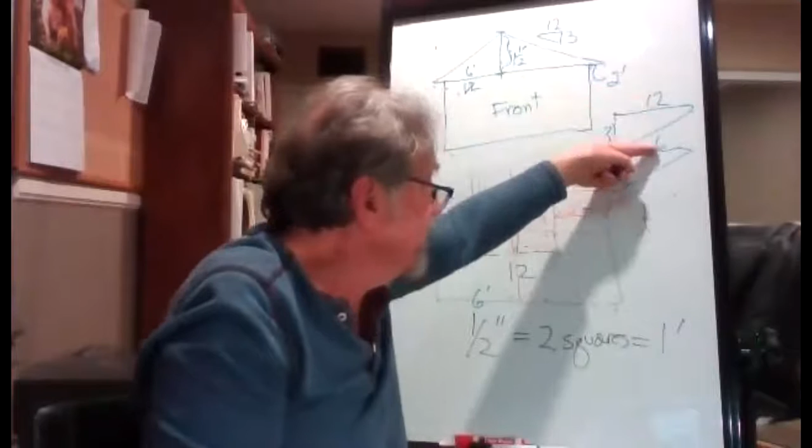So how many total drawings are we gonna have for homework? That's — nah, okay, I'm a little all over the place. Okay, I just want to get this one point: so it's a 3-12 slope, but you can divide both numbers by 2 or multiply by 2 as long as they're the same ratio. So if you divide 12 by 2 and get 6, then you have to divide 3 by 2 to get 1.5. Sure. Does everybody see that?

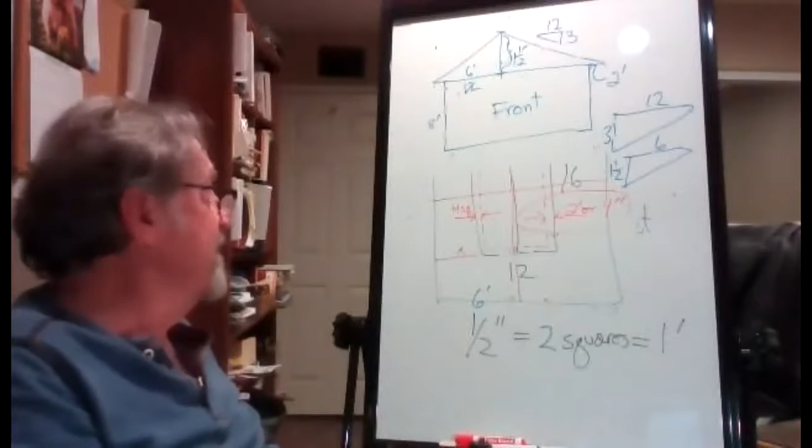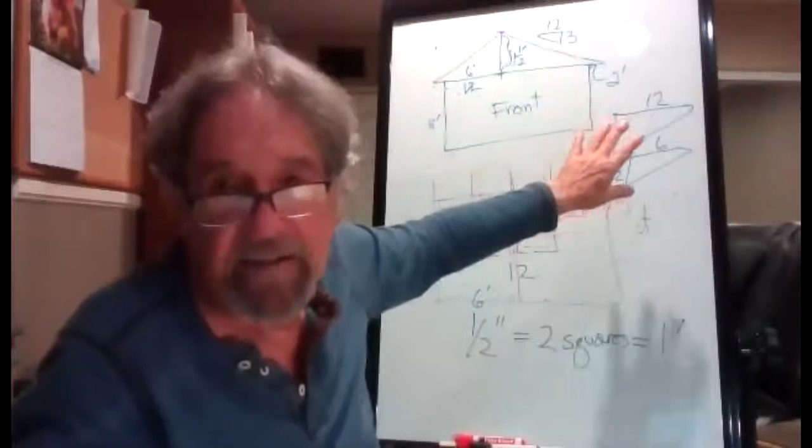Yes. Yeah, Hugo? Yes, it certainly is, uh-huh. Okay, so Hugo, you're good with that? Okay, I tell you, double thumbs up, real good. Thank you. So when we take roof framing, like this summer for instance, or we do the math class, which will probably be in fall or spring, we go over this stuff in detail. So it's kind of a quick showing tonight, but I think you can all get just the basic thing.

So you want one centered overview, like a site plan, and then two elevations. One from the front, that'll look like this.

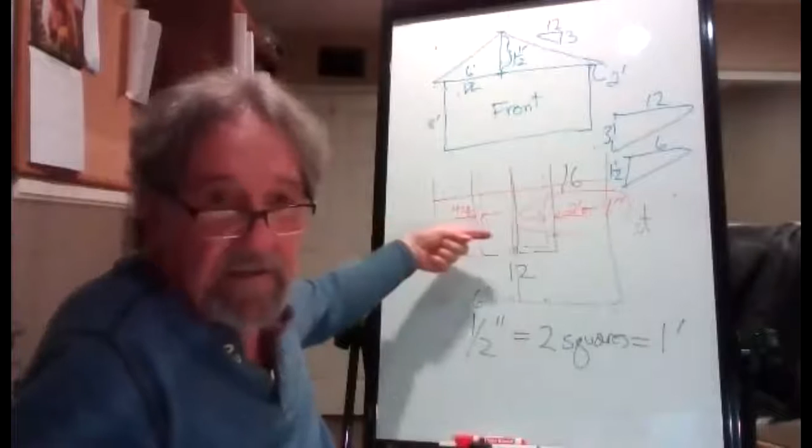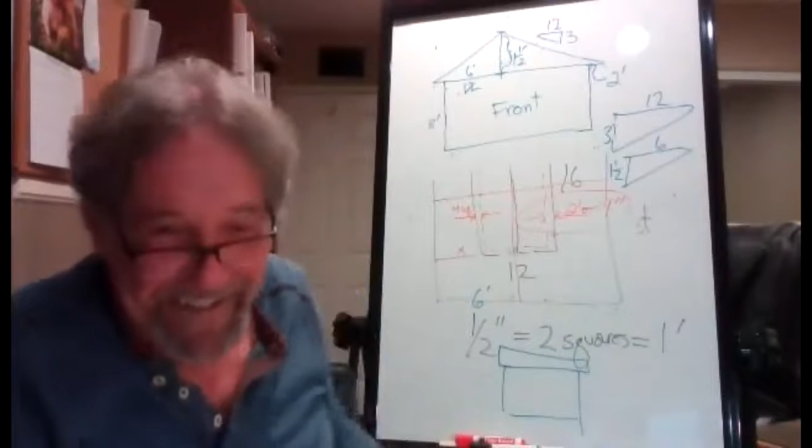One from the side, it'll look like this. No windows or anything, right? Just that, pretty boring. It's gonna have 8 foot walls.

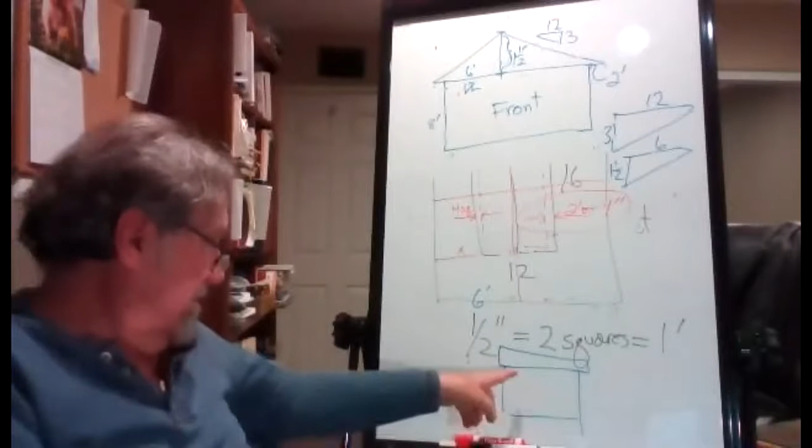What's the measurement from the bottom corner, from left to right? This will be 16 feet, I think we said, right? Oh no, the roof is 16. So this is 2 feet in, and 2 feet and 2 feet is 4 feet. So that means that'll be 12, right? 12 and 2 and 2 is 16.

Okay, so you just want a front and the side, we don't need to draw more. And you can put them on one sheet if you can fit them, or you can change the scale and do it on 2 sheets.

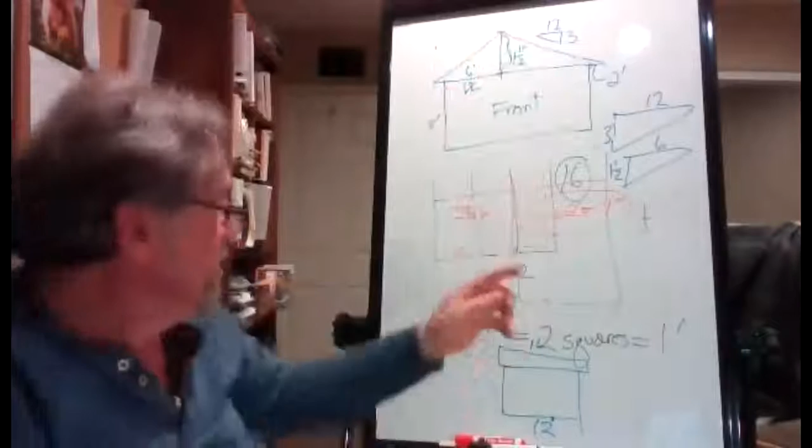If they're usually lined up, it's like you're just turning the view, that's why on a page they're lined up a lot. But you're free to do anything you want, just play with it.

You don't need to master this tonight. I think most of you got most of it. We'll follow how your drawing goes and maybe do another one. That's all.

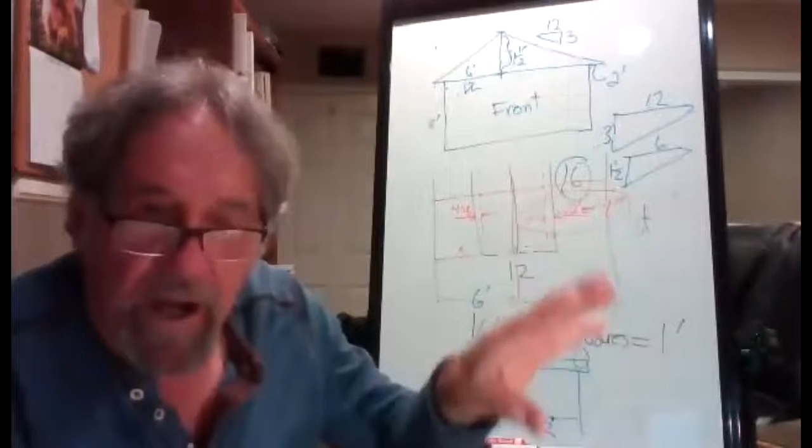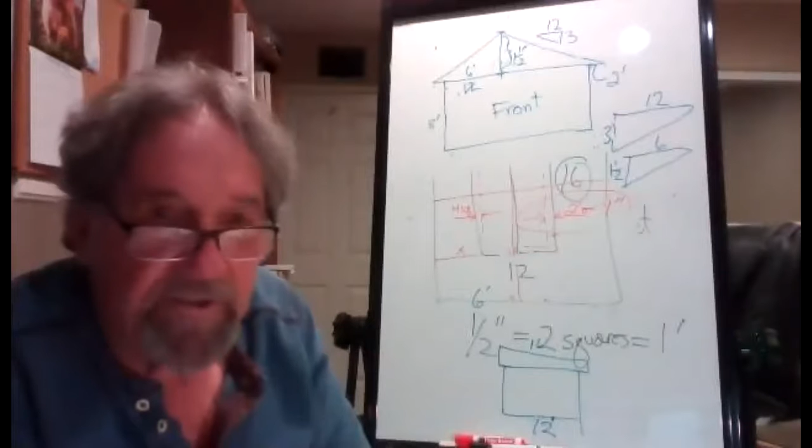I think it helps when you do your own drawing to understand how graphics work, why they put things in places, how they translate from one view to another view. It helps with visualization, like it helps me. That visualization is a real important part of blueprint reading and carpentry in general, and masonry also.

Does it have to be drawn by hand? No, if you have a T-square and a drafting board setup, you can do that. You can use graph paper and use the graph lines to help you. But I want it to scale and straight lines, not like a freehand sketch. We did a freehand sketch last time, remember? I just asked you to kind of show the elevations. Now I want you to do one that's more to scale and with straight lines.